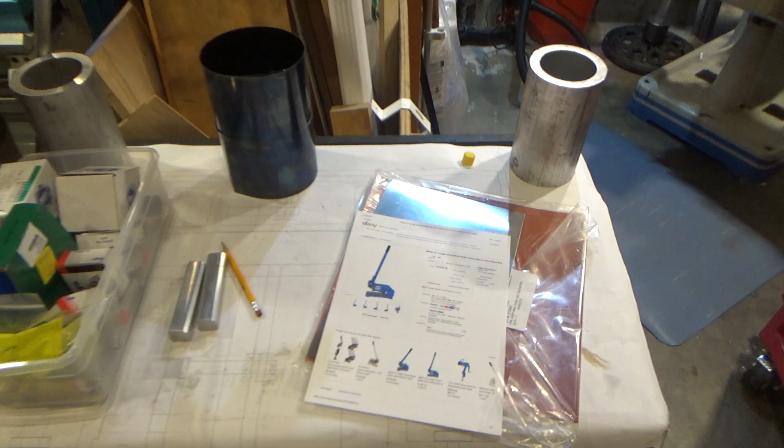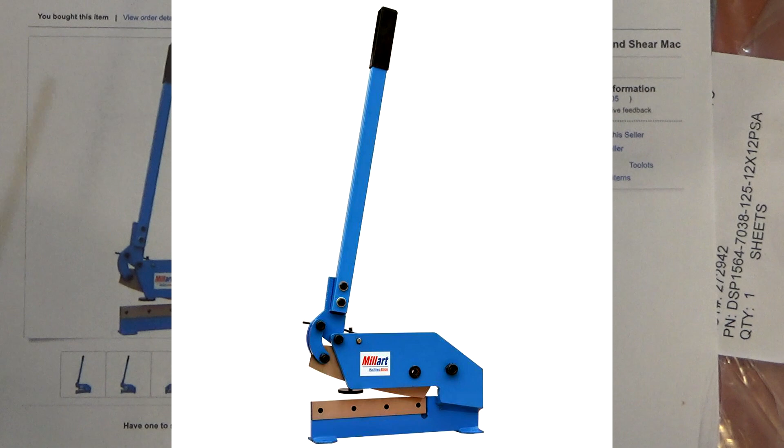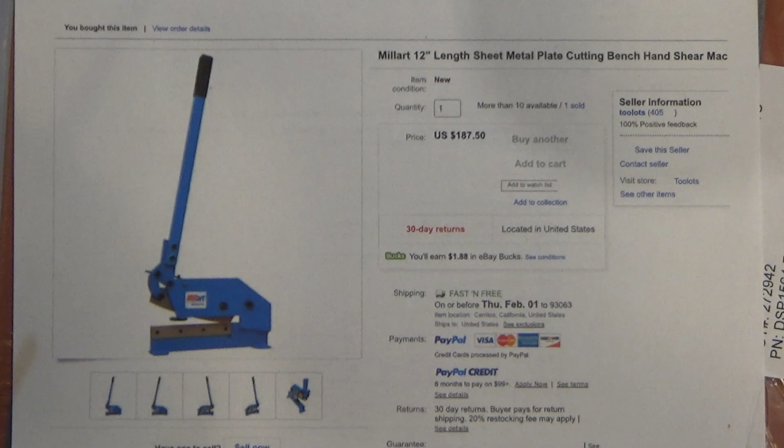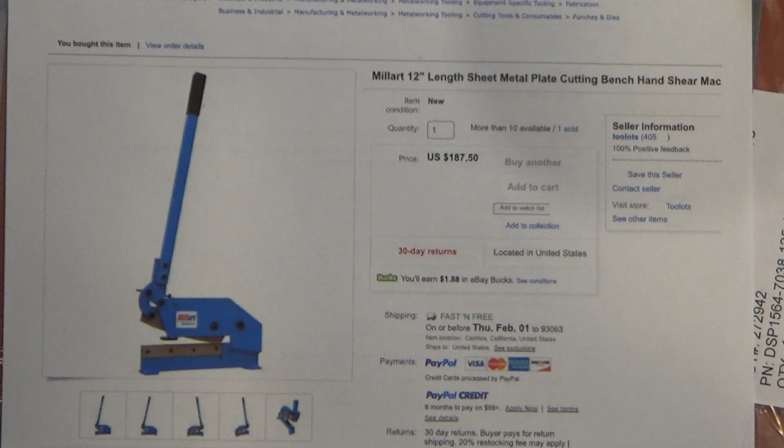In this tool review, I'll be reviewing the Millart 12-inch sheet metal plate cutting bench shear, hand shear. I chose the 12-inch model over the 6, 8, and 10-inch models because the price difference is small and the form factor is very similar, so you're not saving much to get the smaller length. I was looking for something compact but still large enough to do reasonable size pieces of sheet stock for my small projects, and I couldn't afford or have the space for a regular shear. There's no room in my garage for something like the Harbor Freight 30-inch shear, and I certainly can't afford a real shear that would be many thousands of dollars.

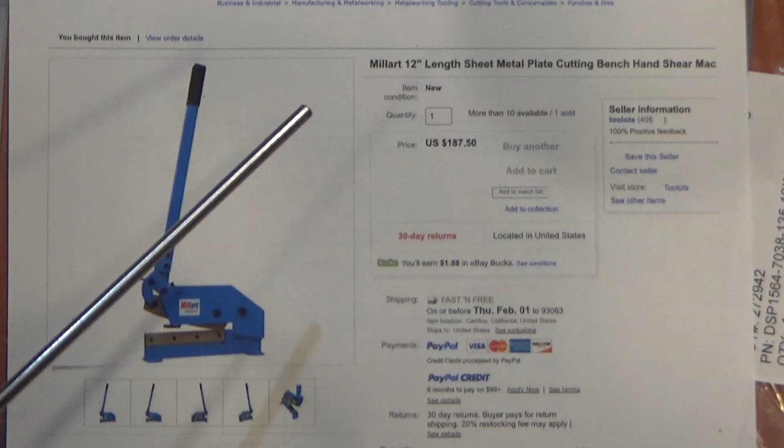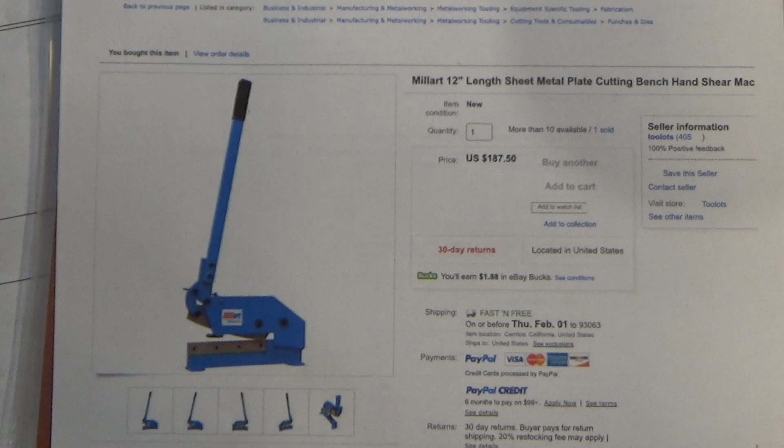So I opted to try this one out. I got it locally, so I got it very quickly. It came from Cerritos, which is not very far away, like 40 or 50 miles. They took one day to ship it, then UPS picked it up the next day, and I had it the day after. So you would think that would mean light handling, right? Let's go take a look.

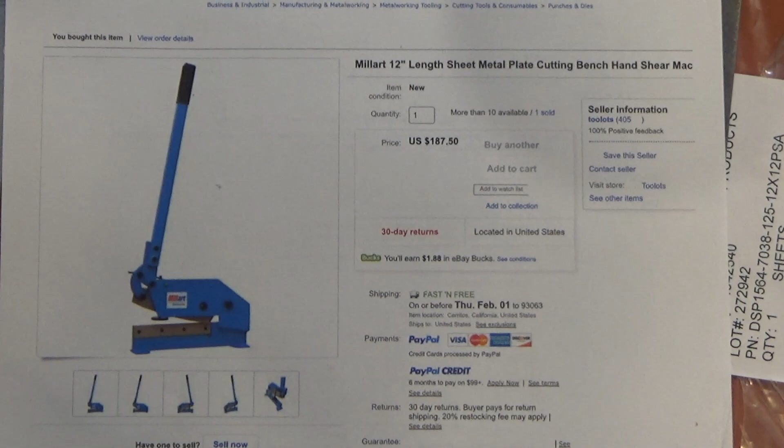The item weighs 57 pounds. I started to cut it open and realized, maybe I should cover this.

The manufacturer and/or the shipper did a nice job, they really did try to protect it. They put plastic on the outside with lots of tape to keep water out, although I live in Southern California, so water's not usually a problem. It's a double thick cardboard box with wood reinforcement, and there's foam on both sides. Still, it was partially blown open when I got it, there were tears along here, and I just cut the rest of the way. But even with the foam protection, the thing is just all a jumble in there.

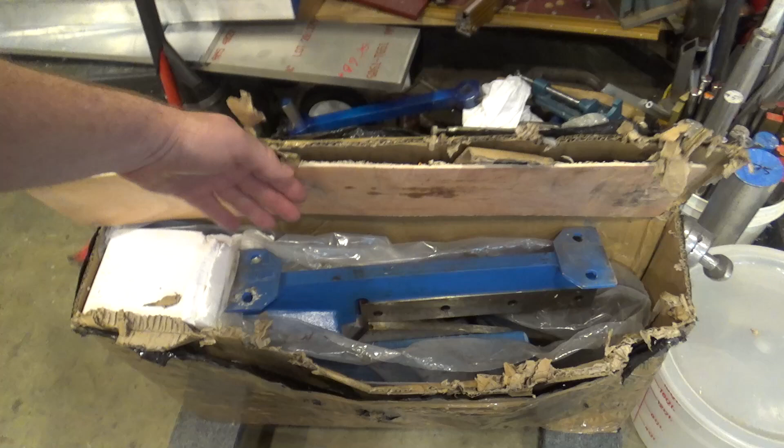UPS, for having it overnight, really did a number on it. Provided it didn't happen at the seller's facility or during shipping from the manufacturer, but I kind of doubt that. In any case, let's get this guy out of here and take a look at it.

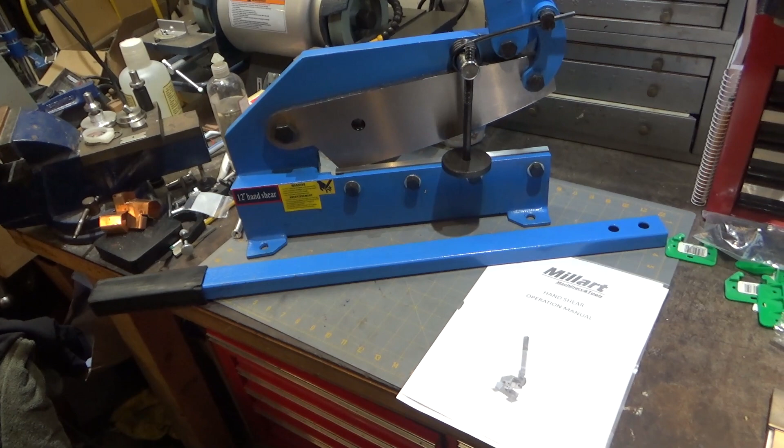So here is how it arrived, and I did clean off some light oil on the blade, but that was about it. I expected to have shipping gunk that takes half an hour to get off with kerosene, but luckily it's light oil only. No rust though, nice condition.

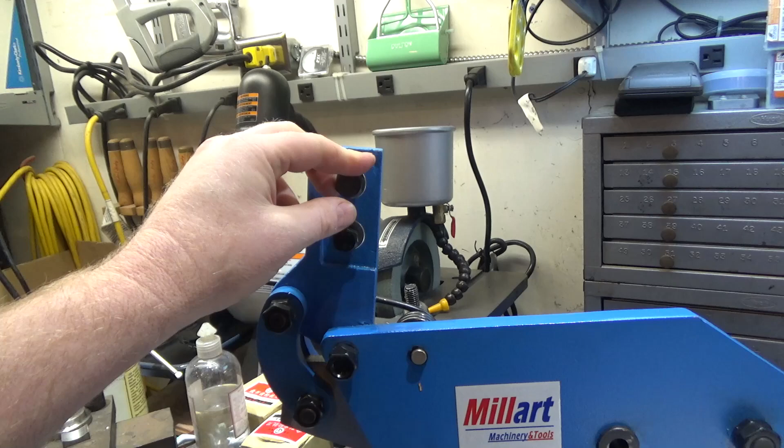One other thing I did notice, let me flip this guy around. First thing I noticed was that the handle wasn't attached. That wasn't surprising, I thought it would come in two parts, but it's actually one beefy handle that's going to bolt on. A lot of the other machines have handles in two parts, so that's a nice plus.

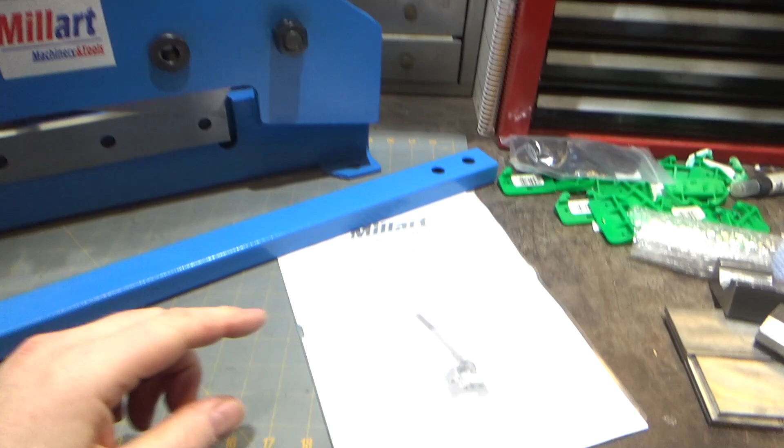The pre-tensioning adjustment for the joint, which basically keeps how hard it holds the blade against the side here and how much blade engagement there is, was completely loose. Maybe that's intentional, although their manual has no reference to adjusting that at all. It does have a blow-up of the parts.

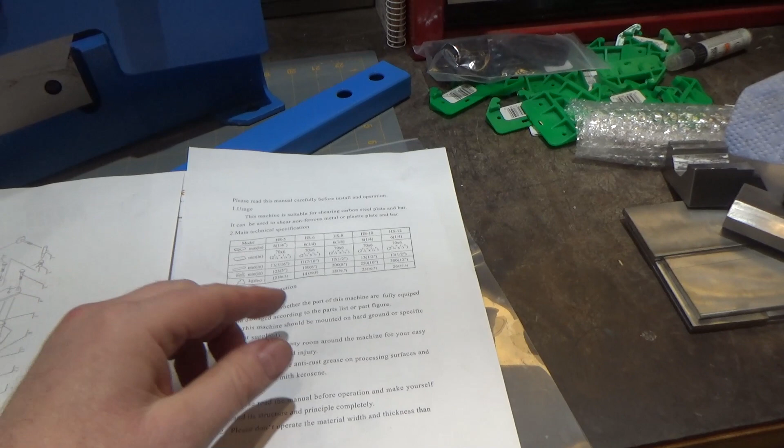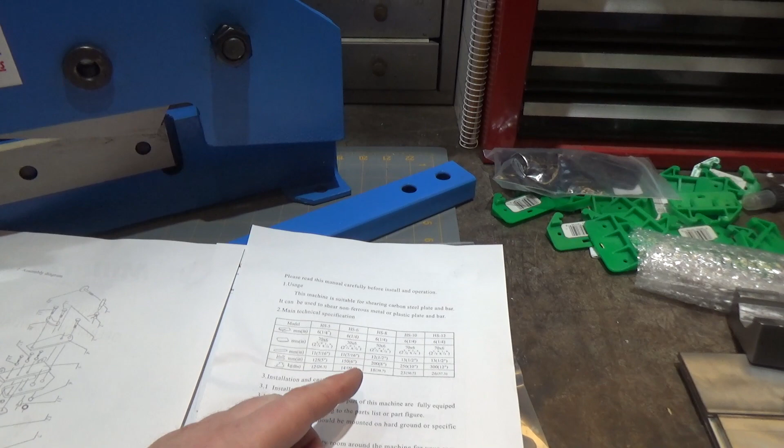It's very, very simple. Let me just pop this out here. It has a blow-up diagram of all the parts in the device, and then basically talks about capacities. So this 12-inch one will cut quarter-inch plate up to 2 3/4 inches wide, or it will shear a half-inch bolt, round stock up to half-inch material, and it'll do 12 inches of indeterminate thickness wide stock, which is the main reason I got it.

So let me put this guy together, see if I can get this tension right. That may require some playing, we'll see. Maybe they left this loose intentionally, or maybe it was not, I don't know, we'll find out.

I also noticed that the joint where this thing rotates on is paint on paint. So hopefully there's a little space in there, I haven't gotten a good chance to look at it yet. I'll bring you right back.

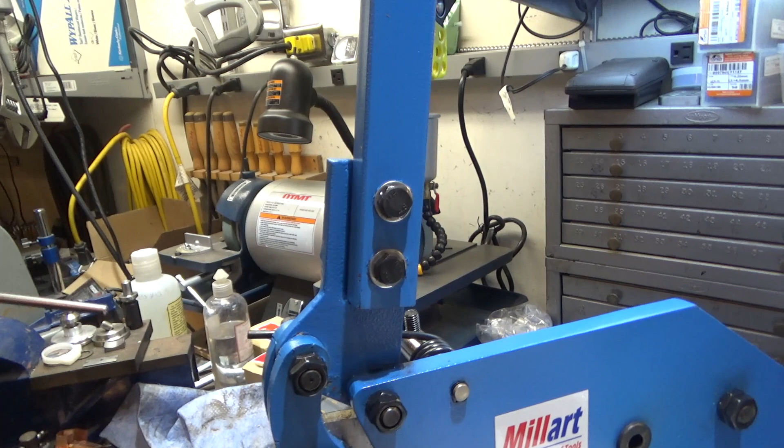So here's some interesting bits I discovered. First, these two bolts are made by different manufacturers, and they're two different sizes, 18 and 19 millimeters, which I thought was very funny. Obviously, when they bought their bolts, they didn't maintain consistency. Second, this bolt actually adjusts the blade only halfway.

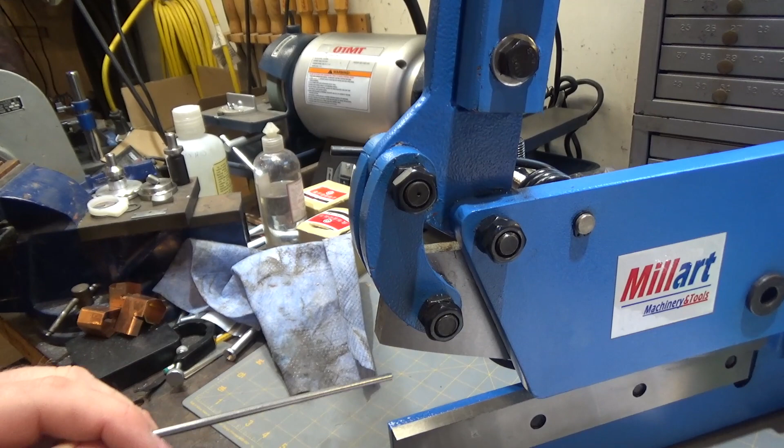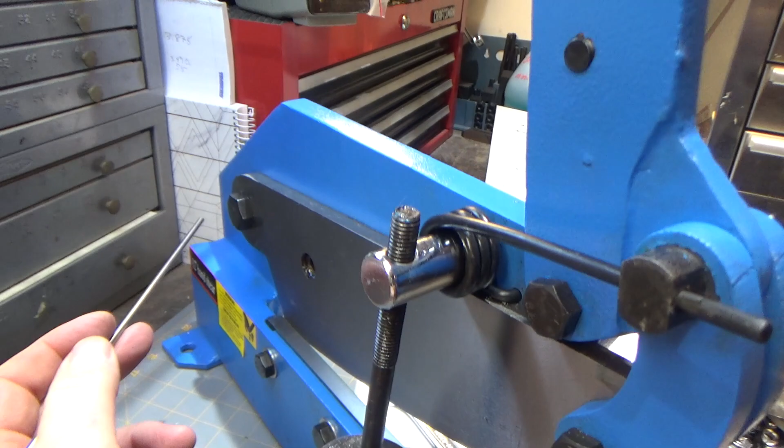It's the front lever point for this whole assembly, and the other blade tightening point is this big bolt in back. What I noticed was that, as I suspected, this was loose for a reason: in here they painted everything, and the first time I got this even a little snug and ran it through its paces, it sheared off the paint inside with the primer. Nice to know they did prime it, since there's primer under the paint. But in any case, that's why they left it alone, so you wouldn't have that problem.

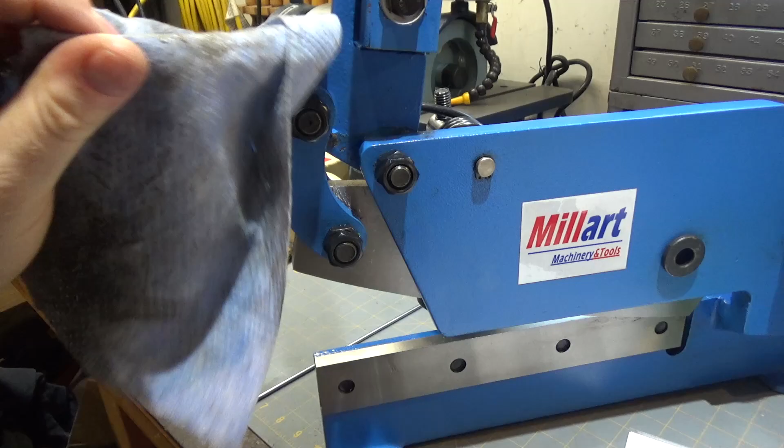So then I went and tightened it, following it up, and you'll notice now there's no paint on it anymore. They probably should have skipped that. I don't know, maybe they thought it would look better like that. Anyways, I set the tension and added some lube to it, and it looks like it's still taking some paint off here, but this will settle out soon enough. So let's turn this guy around and see how it works cutting some thin stock.

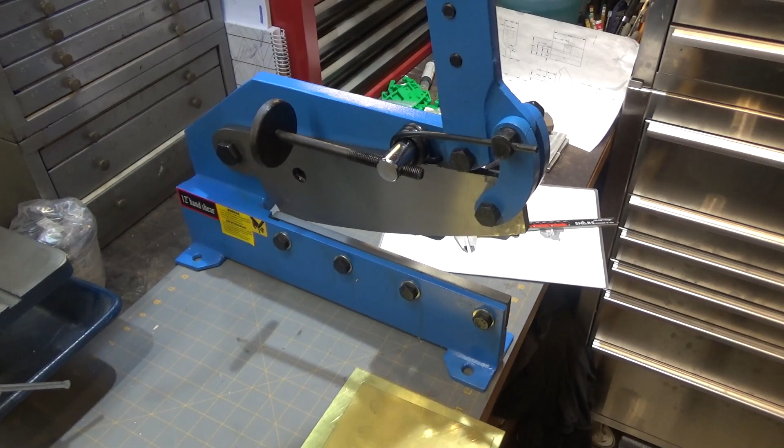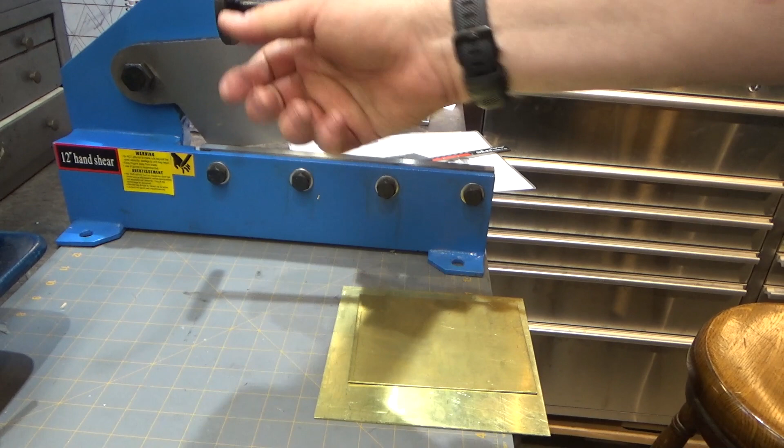Before I move on to cutting, I wanted to point out some other features here. This bit that looks sort of strange, its job is to hold down plate stock so it doesn't bend around the edge if you're doing really thin stock with it. You can flip it up out of the way, so it's not a problem, but it's there to protect that. Some of the versions they sold of the 12-inch size had only 2 bolts on this bottom plate, and I thought, even though there's a relief on the back where this sits in, having 4 bolts was a better choice, so that's why I chose this particular model.

All the ones I was looking at, Baileigh and Kaka, made in India, they're all made overseas, so I thought I was sort of in the same category. The price variation was extreme. I think it should work okay, but we're going to give it a shot. Anyways, those are just some more thoughts I had before we give this guy a test.

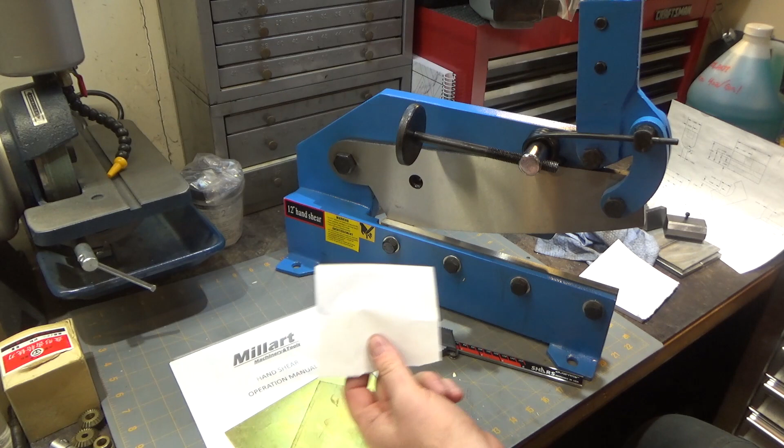For my first go here, I was going to give it the paper test, and the reason for paper is to see how well the blades actually meet. So it cuts paper fine here, and cuts paper fine here, until you get to the very end. What that's showing is that the blade gap is not perfectly consistent along its length. So where that's not going to be a problem for thicker pieces of metal, it's interesting to note that back here the blades are separated enough that paper can fit in between. Up front, however, they're fine.

Maybe they designed this—I can't really see here—with a slight curve in the blades so that it's sprung. They do that with some scissors so it meets along the whole length. I don't know if this one's done like that, I'd have to take this blade off and see how flat it is. But in any case, it cuts paper for most of its length, just not the back where the joints meet. And it's actually a pretty smooth action.

For the next test, I was going to cut some brass plate here, which should be fairly easy for it. The only issue I'm going to have is that I don't have this attached, and I may have to put more force on the front than will keep this guy stable, and the back might want to lift up on me. So we'll have to give that a try and see.

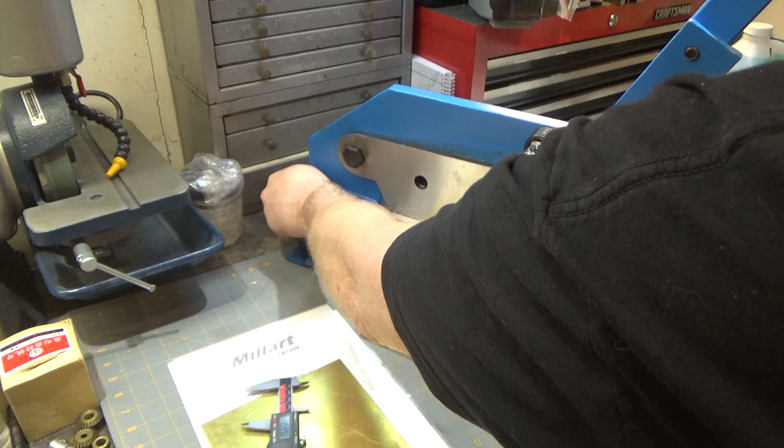There's 50 thousandths and 62.5 thousandths stock, let's give those a shot. So here's 50 thousandths stock. I don't know if I'm going to be able to keep this guy down, but let's try it. Actually, pretty reasonable—the cut is smooth, front and back. Now I know that brass isn't a huge challenge for this guy, so let's see if we can find something else.

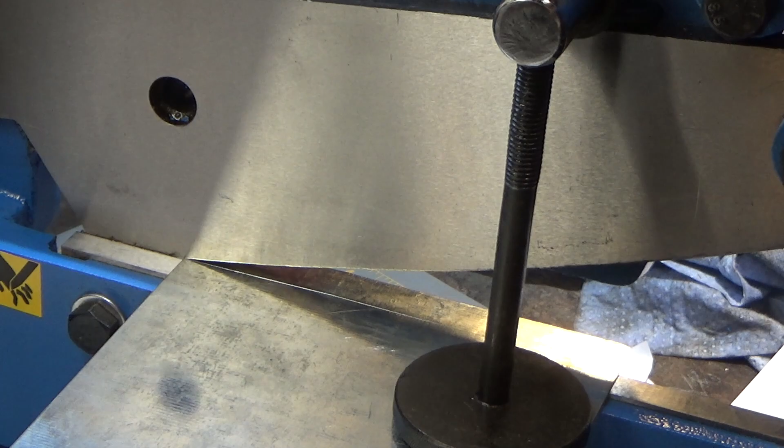So here's a piece of 30 thousandths galvanized. Hopefully I can hold the back of this down enough. Wow, actually that went like butter. That was easier than the 50 thousandths brass. That was a piece of cake.

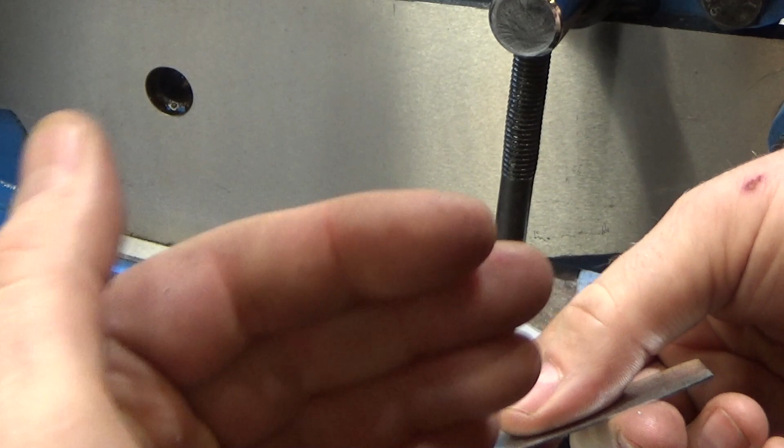No problem, a little bit of curling in the back, which makes sense given the way you're cutting. You're compressing material on one side, so that's going to make it want to flex.

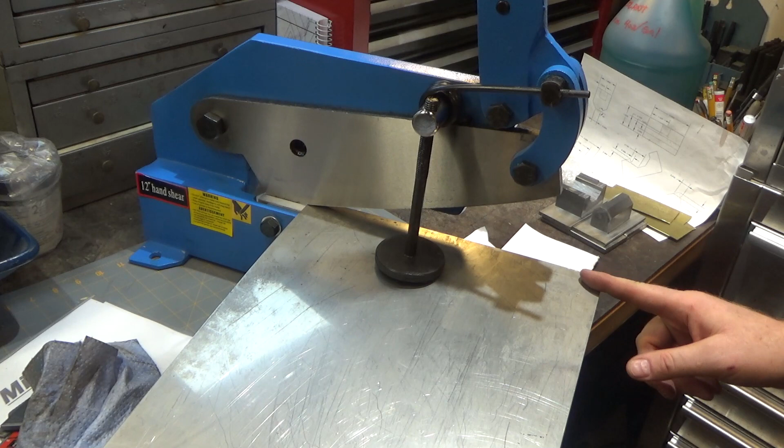So the piece of stainless sheet I've got is wider than the whole tool. It's 50 thousandths, so I'm wondering if I can do it in 2 passes. I don't think so without supporting the rear, but I'm going to give it a shot anyways. Let's go.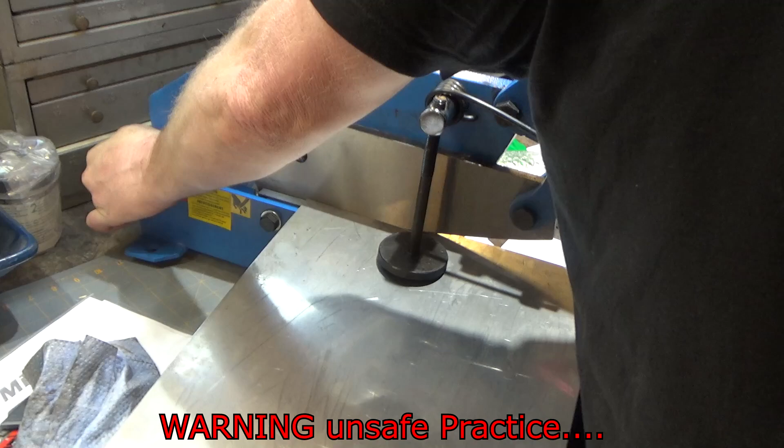Made it halfway, and it actually started off really easy. It's just when the mechanical advantage was working against me, it became a little more challenging.

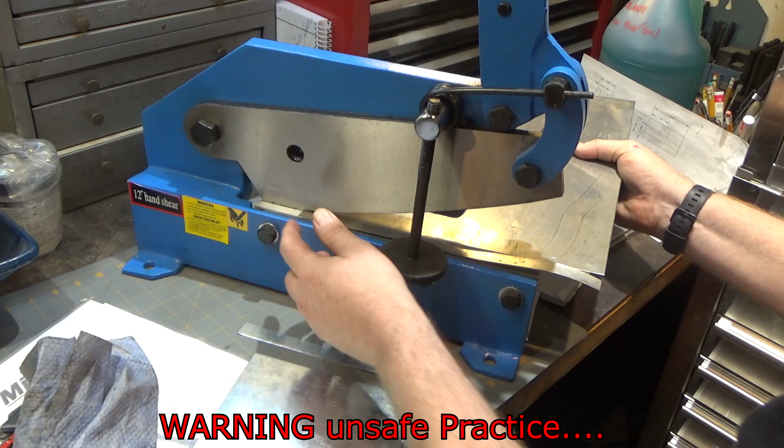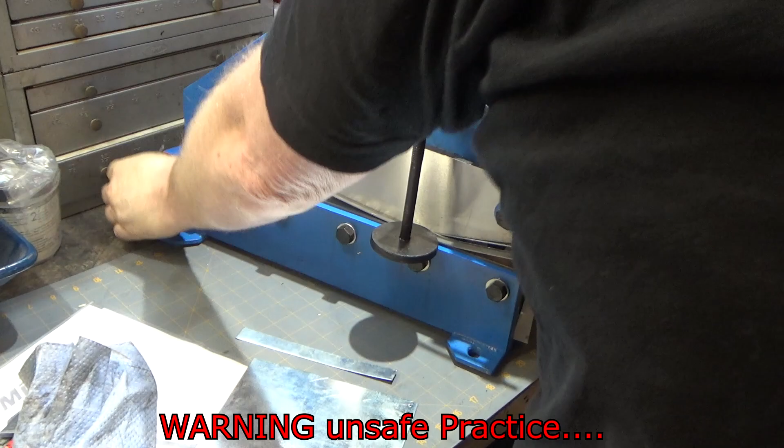So this is cutting off the back side. That was 50 thou stainless, and it wasn't hard pulling on the lever, it was hard keeping the rear end down. You really need to bolt this guy down to something, and I have an idea I'm going to try out, but it actually did a really nice job.

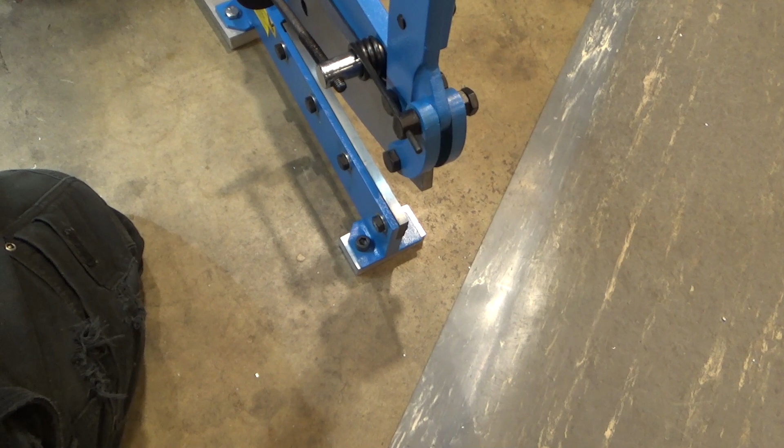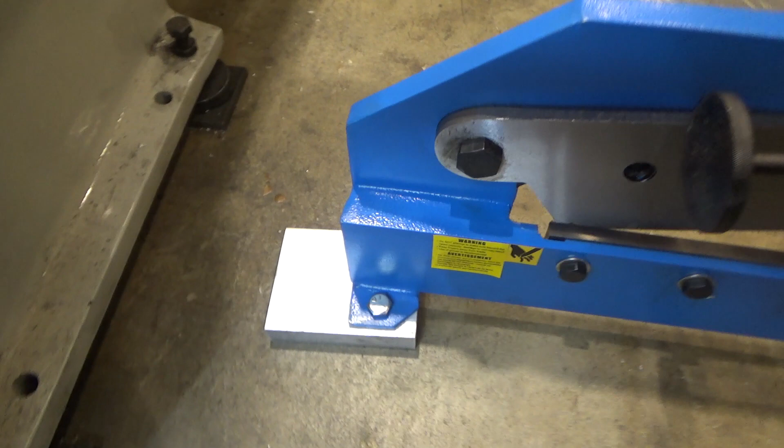So here was my solution to dealing with cutting heavier materials on this guy without being able to bolt it down at this point in time. What I did was I put a spacer under the front and a spacer under the back that sticks out, and I discovered that this bottom plate, they're just welded on and not even square. If you look at the angle of this relative to the top, it's skewed. But then my intention is, here's my lathe, which weighs 3,300 pounds, and

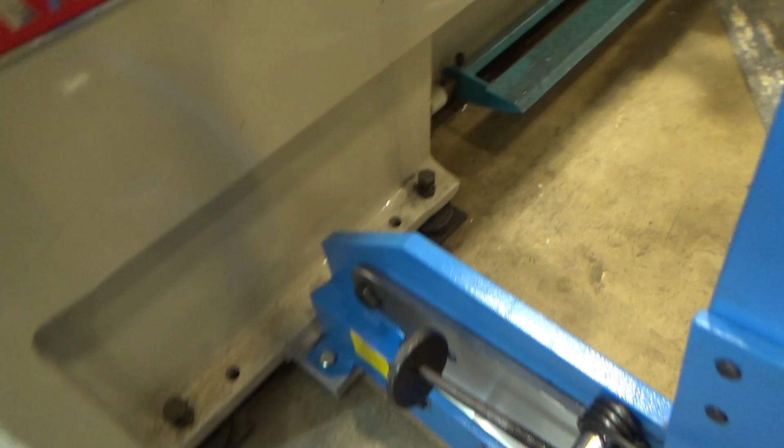all I do is stack some spacers, slide it right under. Now I can cut heavier items, and I don't think this will be a problem for my lathe, because I don't think the force will be that extreme, maybe in the hundreds of pounds. So I don't think that'll mess up my leveling, but I will double check that in the future.

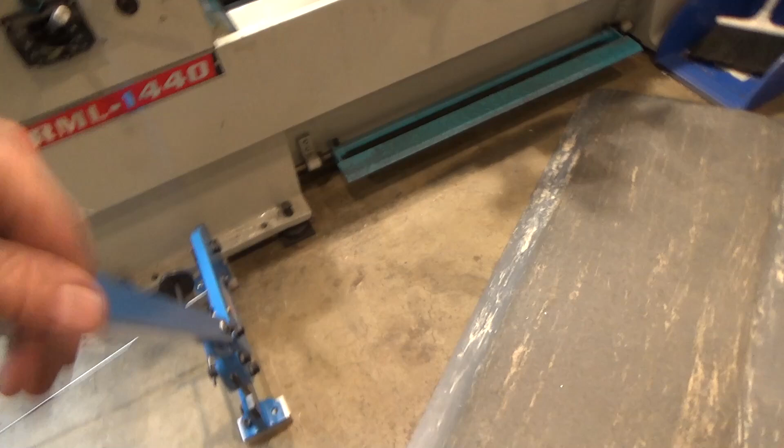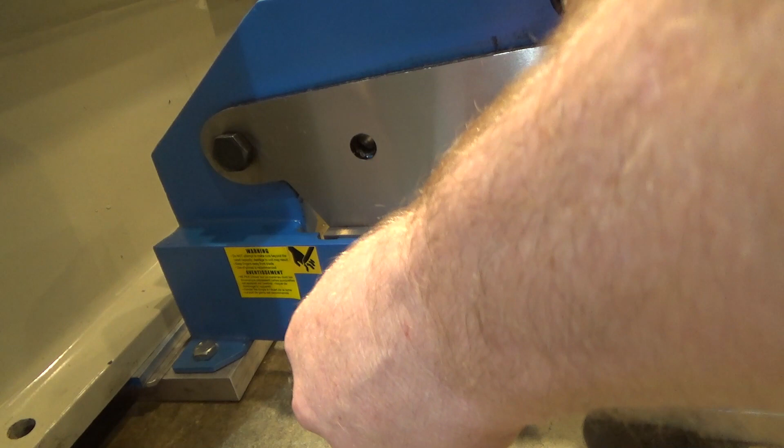In any case, here is a piece of the 3/16 stainless. Let me just stick it through there, and I didn't get it quite far enough. Let's go. 3/16 stainless 1/4" rod, and no problem, cuts right through it. There it is. Here's some 1/8" aluminum. That was trivial.

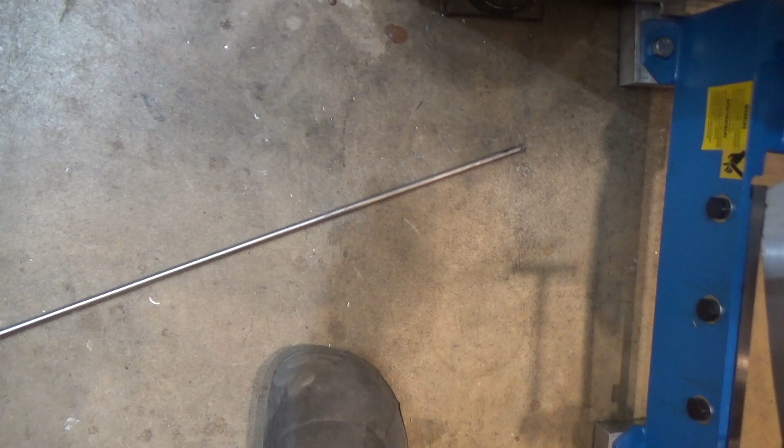Now, they did mention one thing which I thought was kind of funny. They mentioned that this handle may not be long enough if you're going to try and cut the 1/4" plate. I'm pretty sure I'm never going to try and cut 1/4" plate, even a 2" length of it, because that seems a bit extreme. So I'm going to be using this almost exclusively for sheet stock. So I probably will be able to clamp it to one of my benches or find another mount point. But in the meantime, this gives me the ability to do pretty much anything with this guy.

And those are my thoughts. I hope you like this review.

Just to summarize one more time, different sized bolts to hold the handles on. They didn't pre-tighten this adjustment point because they didn't want to damage the paint, I'm guessing. The blade spacing in the rear may be controllable by this adjustment, actually, so I may be able to cut paper even in the rear by making it tighter, but I think I'm going to leave it where it is because it shears the plate stock just fine.

It has 4 bolts instead of 2 like some of the models, and overall I'm pretty happy with it. The price was right. It was 180 some bucks, not terribly expensive on the scale of machine tools. Overall I'm happy with it. The build quality is okay, but functional, and the really important part is the jaws, and they seem to be fine.

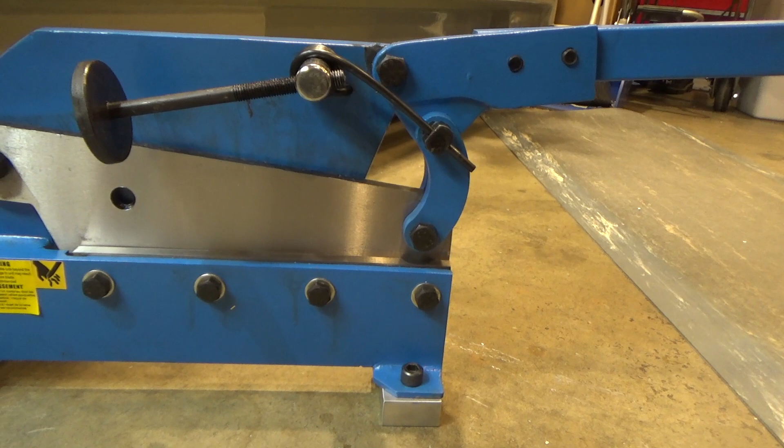So one more thing that I noticed that I should probably mention is a lot of these shears have a pin point on them on the front so that they can be locked with the blade fully engaged, to make it safe in case someone comes over, you know, a kid comes over. But I don't know how useful that is in my shop. No kids around, and that's really not a terrible concern.

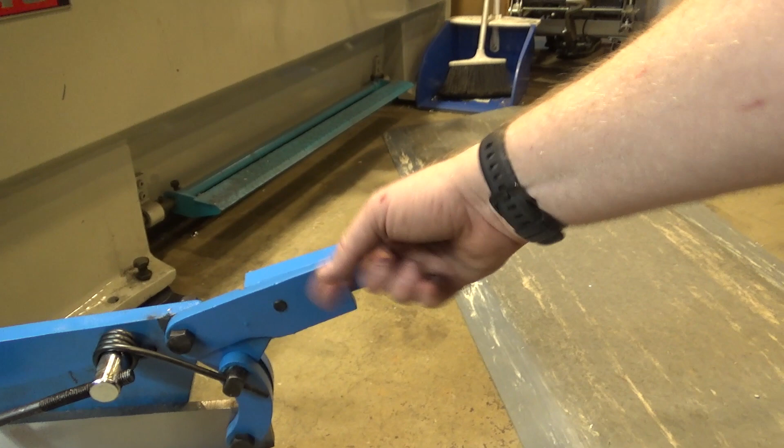Also, that makes the handle stick out horizontally. The other ones, the cheaper ones, have round handles, and you'd have to be able to remove the handle to do this, because it'd be a problem to be sticking out in the aisleway or wherever it is you've got it mounted. So I actually am happy with it this way.